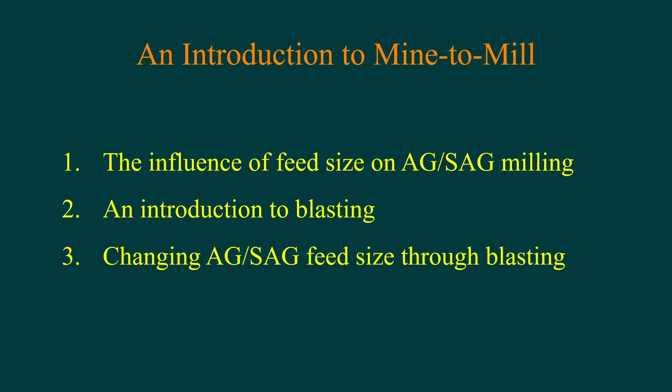The 3 parts cover the influence of feed size on AG and SAG milling. The second part is an introduction to blasting, aimed very much at minerals processors. And last, the presentation discusses how we can change the AG-SAG feed size through manipulating blasting.

Let's first of all look at an historical perspective. If we go back prior to the rise of AG and SAG mills, multi-stage crushing and milling circuits were the norm, and these circuits were relatively insensitive to the primary crusher product. Now, as a result, mining KPIs at that time were driven largely by the minimum cost per cubic metre of broken rock delivered to the primary crusher, and as such, size distribution requirements really only needed to be limited to being able to fit rock into the primary crusher.

As a result, most typical primary crusher products were relatively coarse.

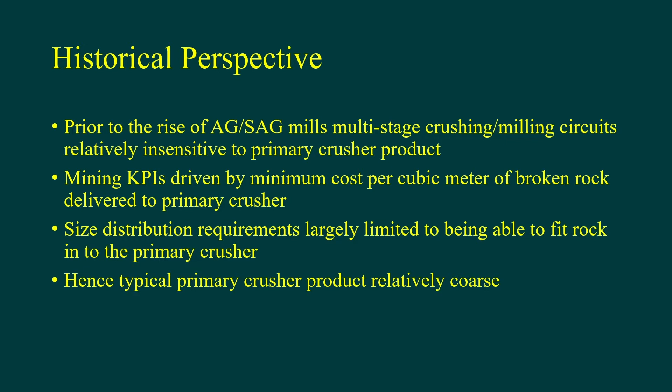As AG and SAG mill circuits started to become more and more popular in the 1970s and the 1980s, experience started to show that they tended to be very much less stable than the more traditional multi-stage crushing and milling circuits, and feed size variations were seen to be the cause of this.

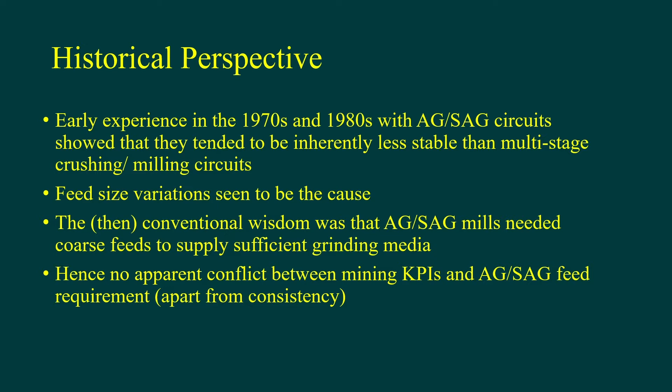Now, the then conventional wisdom was that AG and SAG mills needed coarse feed to supply sufficient grinding media. So with that requirement, a coarse primary crusher product, which had historically been provided to the multi-stage crushing and milling circuits, didn't appear anyway to provide any conflict between the prevailing mining KPIs and what experts at the time thought would be the best AG and SAG feed size requirement.

In the early 1990s, however, views with regard to AG and SAG mill feed size started to change, and one very dramatic and very successful installation at Kidston showed very, very clearly that a finer feed could provide significantly higher throughputs. Now, in the case of Kidston, that was achieved through secondary crushing, and I put there a paper that was published authored by Needham and Folland, which discusses the expansion of that Kidston gold mine back in 1994.

Just out of interest, it was very much the brainchild of Graham Folland. Placer owned Kidston at that time, and they were sponsors of the Amira JKMRC P9 program, and we had developed at that stage the variable rates SAG mill model, and Graham and his team explored the use of that model and looking at what, from a simulation viewpoint, making the feed to their existing SAG mill circuit would do to the throughput.

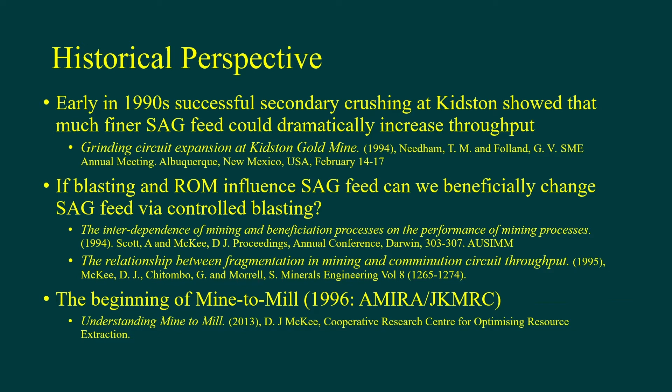And that first research program was co-led by myself and Andrew Scott.

So in this three-part series, we're going to pick our way through that historical perspective and expand on various sections of it. And the first part, we're going to look at the influence that feed size has on AG and SAG milling.

This graph has been taken from the paper detailed at the bottom of the slide here, on the optimization of the Cadia Hill SAG mill circuit. Cadia Hill was the first circuit to have a 40-foot diameter mill, and this paper was presented at the SAG Conference 2001. There are a number of papers about the Cadia Hill circuit, both the design and subsequent optimization. This graph has been reproduced a number of times by various authors over the years as a good example of the influence that SAG feed size has on the performance of a SAG mill.

There is a lot of scatter in the data. It is production data. The SAG feed size F80 has come from image analysis, and as a result one sees this scatter. Nevertheless, the trend is very apparent: throughput goes down as the SAG feed size F80 goes up, and that is in response to the specific energy which goes up as the SAG feed size goes up.

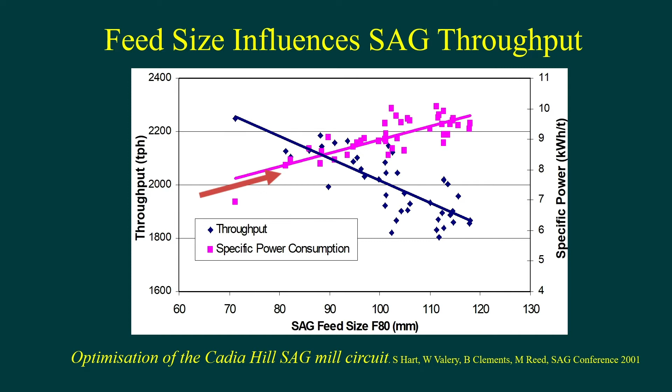The SAG conference volumes are a very rich source of all sorts of information, particularly from a very large number of plants around the world that have experimented with and published information on changing the F80 and what it has done to the SAG mill performance. In all cases, the trends are exactly the same as we saw in that previous slide.

I've been through a lot of those published data and come up with this very simple rule of thumb that will enable you to get some estimate of what to expect on your plant if you were to reduce your F80. The rule of thumb is basically that the percentage reduction in your current SAG mill kilowatt hours per tonne will be approximately half the percentage reduction that you can make in your existing F80.

So let's take an example. If my plant had an F80 of 100 millimeters and I decided to put something in place, whether it's secondary crushing or blasting, and I was able to reduce that 100 millimeters to 80 millimeters, then that would be a reduction in the F80 of 20%.

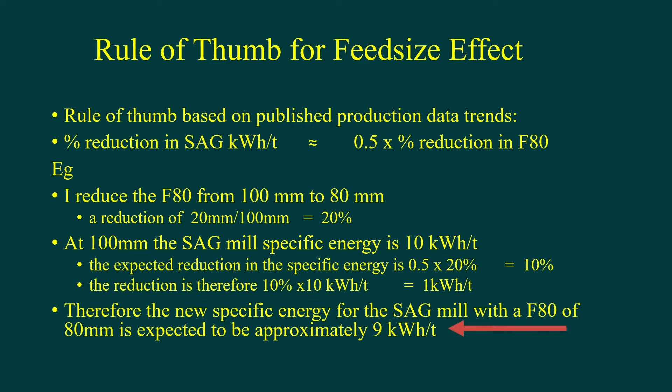A word of warning, however, and it's to do with the use of single point descriptors of size distributions. I've talked about this before in the masterclasses that some of you may have looked at. Distribution is important, and it is particularly important when we look at feed sizes to SAG mills.

Here we have two distributions. These are real distributions, from a plant that I did some work on, and you can see here the blue line has a smaller F80 than the orange distribution, but you can see they have different shapes.

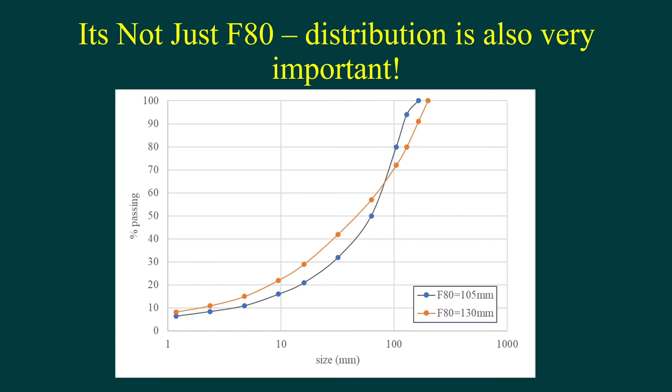That size fraction is in the so-called critical size class, a term you may have heard before, used to describe material in the SAG mill that the mill finds quite difficult to break down, and any build-up of that tends to limit the throughput.

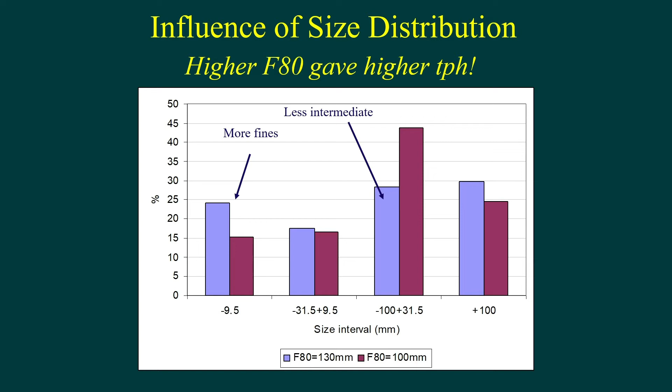Here is another very good example of the influence of feed size distribution on SAG mill throughput. The data in this graph have been taken from a paper that myself and Walter Valery put together back in 2001 for the SAG Mill conference. These two distributions come from one plant which has two feeder lines, each feeding a separate SAG Mill, 1 and 2.

In this case, the feeder lines were installed underneath the stockpile asymmetrically, and because of the inherent segregation that occurs in stockpiles, one feeder always fed a coarser distribution than the other. You can see that very clearly in SAG Mill 2's feed, the blue lines and points, which is much coarser. Even though it has the same P80, the distribution is very different.

If you recall one of those earlier slides where we discussed the varying amounts of intermediate size material and the influence that had on throughput, we can see here that SAG Mill 2's feed has much more of that intermediate size material and much less fines than SAG Mill 1. As a result, on this plant, the finer feed, which always went to SAG Mill 1, gave consistently 50% higher throughput than the coarser distribution.

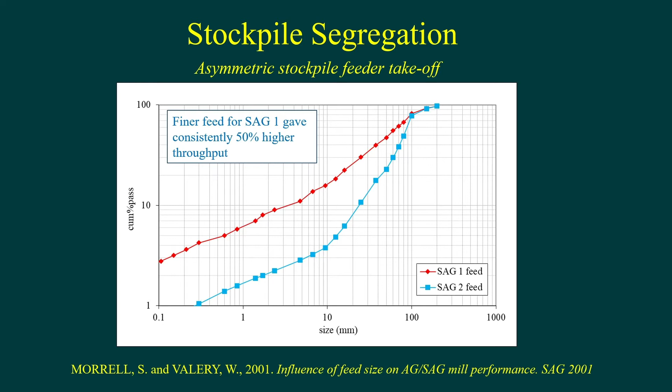While we're on the subject of stockpiles and stockpile segregation, I collected these data many years ago at a plant that had a stockpile level indicator. I was able to collect these data from a period where the primary crusher had to go down for maintenance, so the SAG mill circuit was being fed from the stockpile. As time went on, the stockpile level dropped, and because of segregation in the stockpile, that gave a change in the F80 to the SAG mill circuit. This particular plant had an image analysis system, so it was able to monitor that change in the F80.

The blue line shows the stockpile level. Initially it's relatively constant, and as a result the SAG mill kilowatt hours per tonne, the purple triangles, is reasonably steady, and the F80 also reasonably steady. If you look at time period 3, that corresponds to when the primary crusher had to be taken offline and the stockpile level starts to go down. Initially, not much change in the F80, but then by time period 4, things start to change. F80 starts to ramp up, and straight away the SAG mill kilowatt hours per tonne goes up.

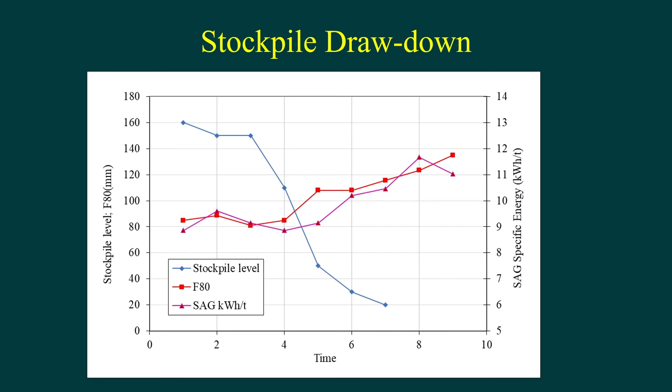When you're at the design stage of a new SAG mill circuit, the subject of what will be the SAG mill F80 will be discussed. I don't know how many projects I've been on over the years where I've seen the specification put out by the engineers or the equipment manufacturers that the SAG mill feed size is going to be 152 millimeters. Now 152 millimeters is 6 inches, and there were large numbers of engineers that thought that was a reasonable number to expect for a SAG mill feed.

When you look at the equipment manufacturers' primary crusher tables, and the relationships they have between closed side setting and the crusher product, 152 millimeters, 6 inches, can be achieved by a closed side setting of round about 6 inches, and everybody, well, at least some people, seem to be quite happy with that.

In practice, it's nonsense, and the reason I say that is that the graph in the figure is a histogram. Those blue blocks are a histogram, and each represents a certain size class. The data used to generate that histogram come from over 100 operating SAG mills around the world, and you can see that the mode is between 85 and 110 millimeters. So on average, the SAG mill feed size is under 100 millimeters.

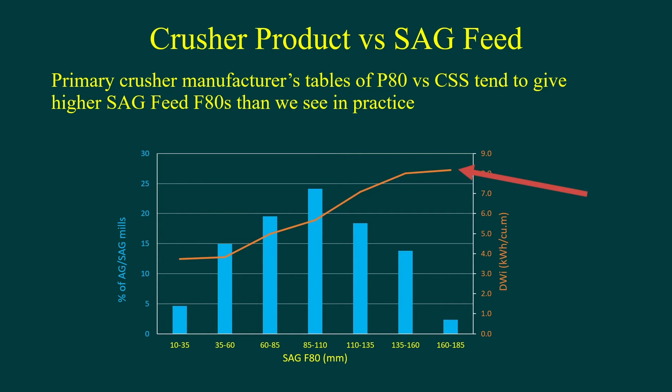Now, before I move on, one of the reasons why some SAG mill feed sizes are bigger than others is not just to do with closed side setting. There is a definite correlation between the hardness, the competence of the rock, and the SAG mill feed size. That orange line is the correlation from that large database between the DWI, which comes from the SMC test, and the SAG mill F80. What it clearly shows is that on average, the harder the rock, the coarser the SAG mill feed will be.

So let's have a look a bit more closely at what appears to be a disconnect between the primary crusher product P80 and the SAG mill feed F80. To do that, we're going to look at some data mostly provided by Dr. Walter Valery and his team at Hatch. I would like to acknowledge their contribution and generosity in allowing us to use this data.

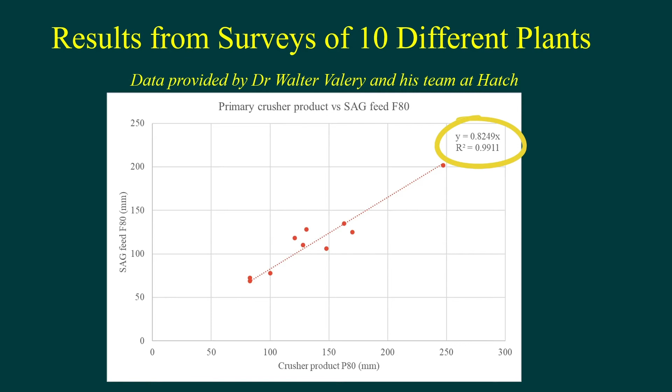What this graph shows is the crusher product P80 along the x-axis that Dr. Valery and his team measured at a number of different sites, plotted against the SAG mill feed F80 on the y-axis that they also measured at the same sites. Now you can see it's correlated, and the correlation is quite high. The simple linear equation shows that the SAG mill feed F80 is approximately 80% on average of the crusher product P80.

Now you might be thinking, isn't the primary crusher product the same stream as the SAG mill feed? The answer is no, because in between the primary crusher product and the SAG mill feed is the stockpile. If you take all of Dr. Valery's size distribution data that he provided and average all the stockpile feeds and stockpile products - remember, stockpile feed is the primary crusher product, and stockpile product is the SAG mill feed...

And we compare those distributions, you can see from this graph the stockpile feed, the blue lines, compared to the stockpile product, which is the orange line - they are significantly different. The stockpile product, which is the SAG mill feed, is finer than the stockpile feed, which is the primary crusher product.

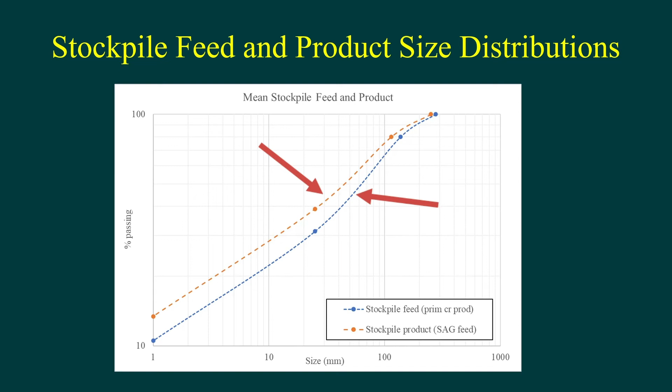So what's going on? Well, stockpiles can be up to and over, in fact, 40 meters high. If you do some very simple calculations, the specific potential energy of a rock 40 meters off the ground is about 0.1 kilowatt hours per ton. Now you might think, well, that's nothing, don't even need to think about that. But if you consider that the net specific energy of a crusher, taking a feed F80 of about 250 millimeters and reducing it down to 125, so basically halving the F80, it would use, for an average hardness rock, something like 0.1 kilowatt hours per ton.

So we're led to the conclusion that stockpiles are, in fact, comminutors.

To some of you, this might come as a surprise. To others, possibly not. Certainly if you've had any experience in iron ore production, specifically direct shipped ore, DSO, those producers are well aware of what size reduction stockpiles, transfer chutes in conveyors, and bins all do. And the reason they know about this subject and are quite aware of the influence is...

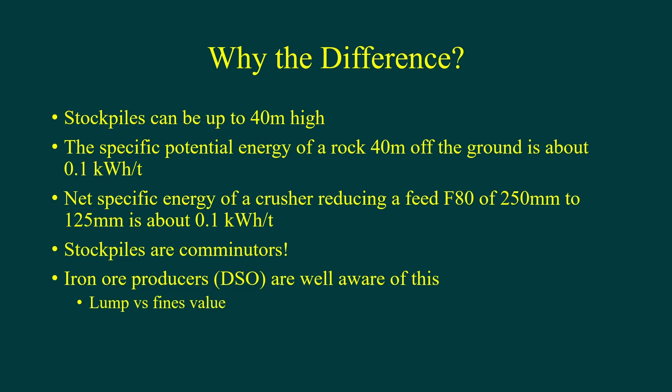Now it transpires that you can relatively easily put together a model which will predict the comminution effect that a stockpile will have using power-based techniques. This is the equation I've put together, and it will ultimately appear as one of the tools on the SMC testing website. Of course, you're welcome to use this equation straight away now if you want to code up your own Excel spreadsheet.

And the equation effectively uses the standard Morrell equation, and in this case we're looking at predicting the stockpile comminution specific energy using the MIC, P80, which is the product of the stockpile, and F80, which is the feed.

Now this term here can be obtained directly from the specific potential energy, which can be calculated from the stockpile height. So you know this term. You know this term here because it's the primary crusher product. You know this term here because you've done an SMC test. So by rearranging that equation, you can work out what the P80 is. And that's what that tool will do for you.

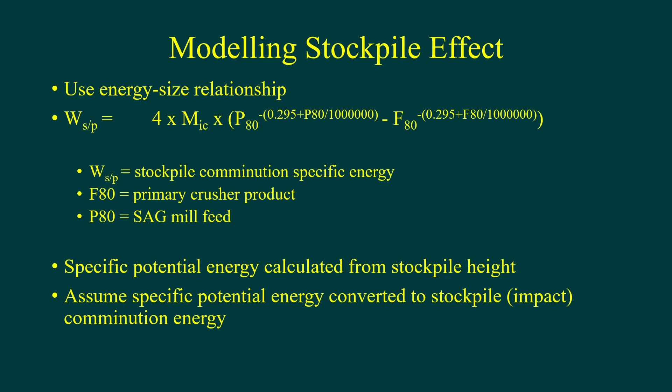And the assumption is that the specific potential energy is converted into stockpile comminution energy — impact. It is specifically assumed, and we'll talk about this in a minute, that the energy is converted to impact size reduction.

This is how well the model worked in predicting the stockpile product P80, and by and large I'm quite pleased with how accurate it's turned out to be. We had to make the assumption that the stockpiles were half full. Walter and his team, when they were doing their surveys, were not interested in stockpile height — there's no reason why they should be — so that information wasn't collected, and we had to make that assumption. Using that assumption, the predictive accuracy is quite good.

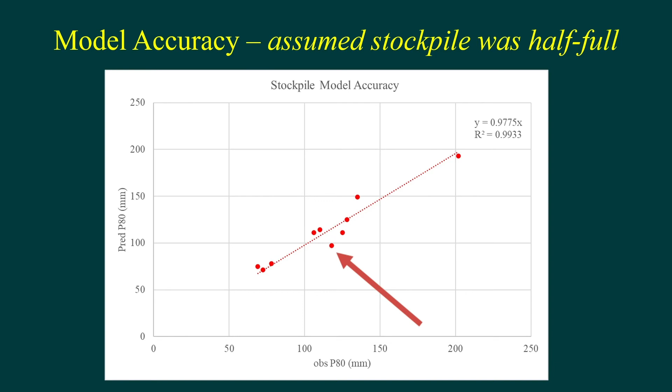There is at least one data point, this one down here, where I was really not too happy with its predicted stockpile P80 compared to what was actually measured in practice. And there's something else going on there, and that's something I want to explore with you in the next couple of slides.

When we look at that one data point in particular where the model is not as good as I wanted, we see something really quite interesting when we compare the shape of the stockpile feed to the stockpile product. Way up at the coarse end, there's been almost no change whatsoever in the size distribution. But as we get to the finer end, we see a significant divergence between the stockpile feed and the stockpile product. Basically, in this case, a lot of fines has been produced by the stockpile. And I think what's going on here is that we have a significant amount of abrasion-type size reduction taking place.

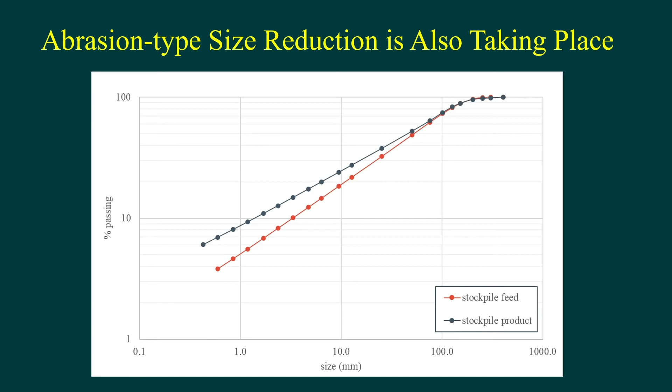Now compare that previous slide, which I think signifies abrasion-type size reduction, to this information here — these two distributions that come from a stockpile where more impact-type size reduction takes place. You can see a very different transformation from the stockpile feed to the stockpile product. Largely, it's a parallel shift in log-log space from stockpile feed to stockpile product.

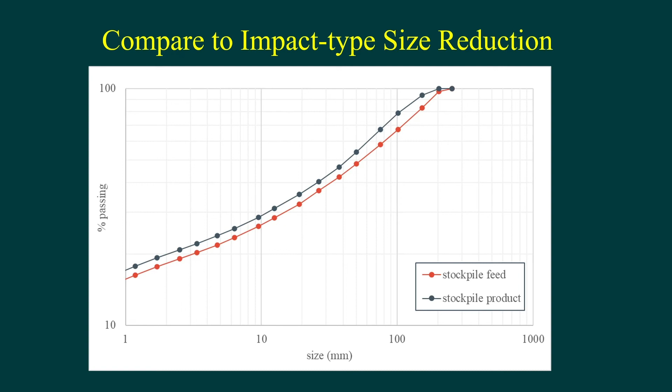So, what's going on in the stockpile with respect to size reduction?

The conditions for comminution, or at least two conditions for comminution, are that you need, one, an applied force, and two, you need relative motion. What do I mean by that? Let's look at impact and abrasion.

If we look at impact, in this case here we have a rock impacting another rock, we have relative motion in that this rock is moving relative to this rock here, which is stationary. And there is an applied force. In this case, the force is being applied and supplied by the movement of this rock.

Now let's look at abrasion. Abrasion typically is where there is relative motion in this direction and that direction, and an applied force is being subjected through this line here.

So if we consider our stockpile, this sort of condition here, impact, would be when a rock falls from the head pulley of the feed conveyor, down onto the top of the stockpile, some meters below it. In other words, a stockpile which is not full.

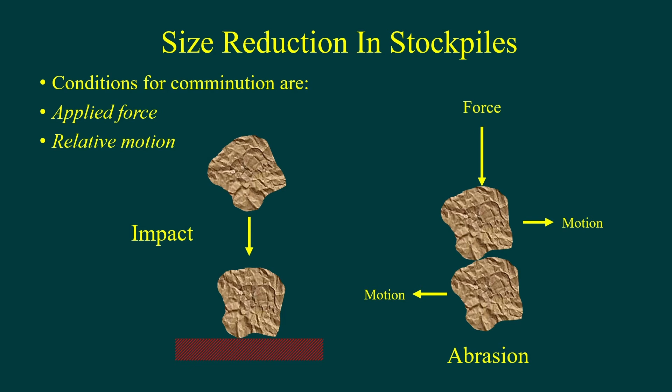Now, the model I spoke of that will ultimately go on the SMC testing website is a power-based equation, so it really can only deal with changes in the 80% passing size, and it effectively is an impact-based model.

It is possible, and it's really not that difficult, to also develop, and that's what we've done, a simulation model using the JK SimMet degradation model that sits in a standard JK simulator.

The trick to using that to accurately predict the stockpile is to recognize the fact that abrasion breakage looks quite different to impact breakage, and we encapsulate those shapes of those curves in what we call the appearance function. Those of you who looked at the modelling masterclass, I talked about appearance functions. They are size distributions, and here we can see a typical impact appearance function, that's the orange line, compared to a typical abrasion appearance function.

If you know what those appearance functions are, you can put together a fairly simple energy-based model that transforms the stockpile feed into a stockpile product. And depending on whether the stockpile is half full, a quarter full, or completely full, you can weight the amount of each of those appearance functions that are necessary for the simulation to be accurate.

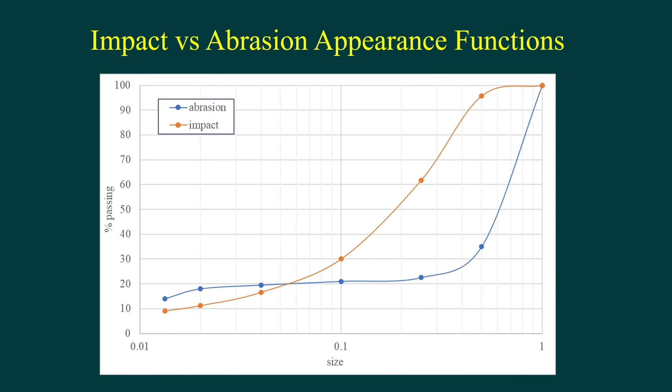So if we revisit that one data point, if you remember, I talked about earlier that the power-based model was not very good at predicting. To summarize, I think what was going on at that one particular site was that the stockpile was running full, almost completely full. And so when we looked at the stockpile product compared to the stockpile feed, the F80 had hardly changed, hadn't changed at all, but we did see a significant change at the fine end.

That's because if all these ideas are correct, then with the stockpile running full, 100% of the size reduction would have been due to abrasion type comminution. So with our JK SimMet simulator, energy-based simulator, using an abrasion style appearance function and putting in the right amount of energy associated with the height of that full stockpile, then what you see before you now, the red dotted lines, is the predicted distribution versus the measured one.

It actually looks like I've fiddled the data, but I assure you I haven't. That's basically what popped out, probably a bit of luck. Normally one's never this lucky, and it's only one data set.

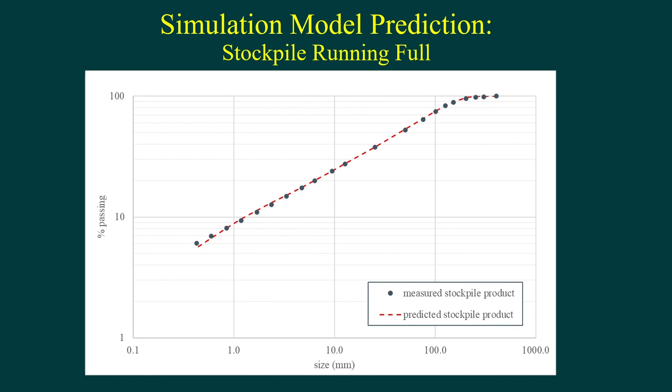So you will get an increase in throughput, and quite likely it might be of a similar magnitude to the increase in feed size one's likely to get if, say, the stockpile was empty and all the size reduction was purely impact.

So to finish off, is reducing feed size a panacea? Well, certainly if you reduce the feed size to a SAG mill in open circuit - and by open circuit I mean those closed with trommels or a coarse screen, which can have a pebble crusher or not, that's not relevant here - there is no doubt that if you reduce the feed size, you will increase the throughput.

However, as you increase the throughput, the SAG mill product size will become coarser, and the ball mill will therefore have to do more work. It'll have to do more work because you're increasing throughput, but even more work because the material coming through to the ball mills will be of a coarser size.

And if you don't have sufficient ball mill capacity to produce the grind that you want, then you will have to accept a coarser grind.

Now, that's fine for SAG mills, but what about AG mills? Well, AG mills are very different - if their feed size is too coarse, that's not good, and if it's too fine, that's not good either. And if you think of rocks as grinding media, then think about substituting balls for rocks.